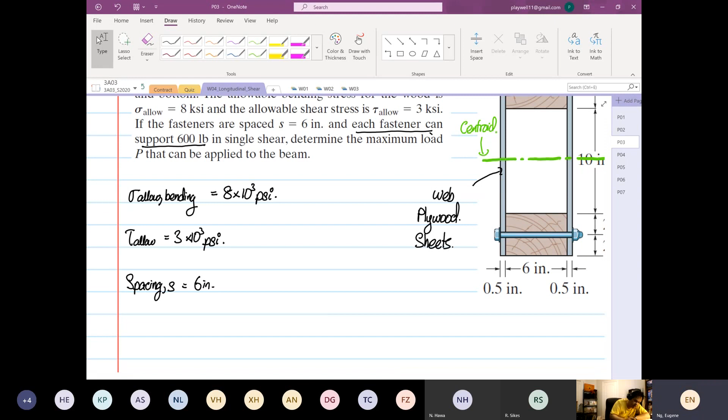Spacing S is equal to 6 inches, and each fastener can support or resist 600 pounds in single shear configuration. So each fastener can withstand 600 pounds. The force it can withstand is equal to 600 pounds of force. The fastener can resist under single shear.

Can you all remember what is the difference between single shear and double shear? Anyone please, can you remember? What do we mean by single shear and what do we mean by double shear? When you have double, you technically have two sectional areas, so you have to multiply. I don't remember, multiply or divide by 2. So the force it can withstand is twice. Okay, that's double shear.

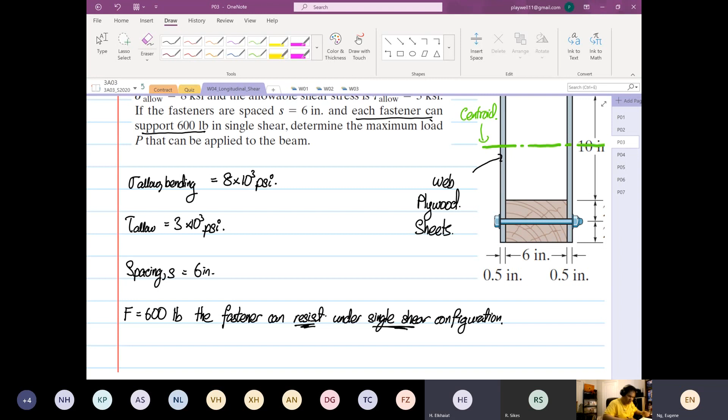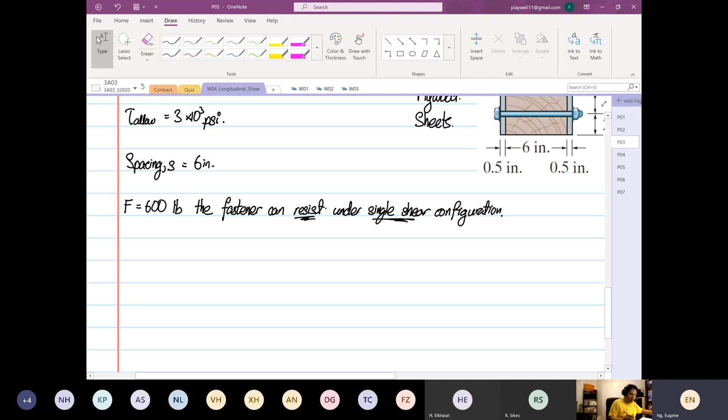So I'll draw for you single shear. Let me recap, I think you guys should have done this in 2P04, some of you have done it a long time ago. So single shear configuration goes like this. So this is single shear.

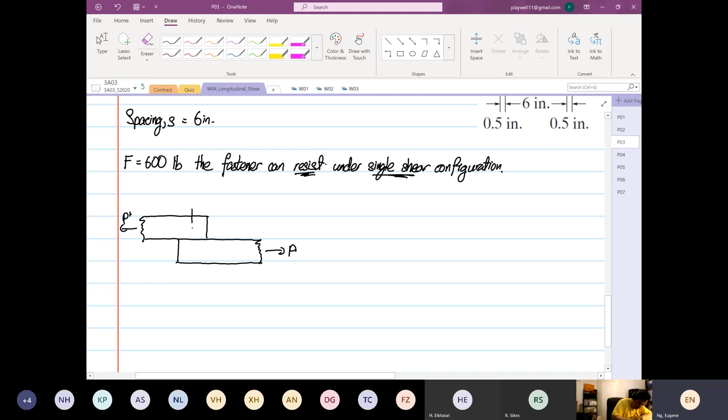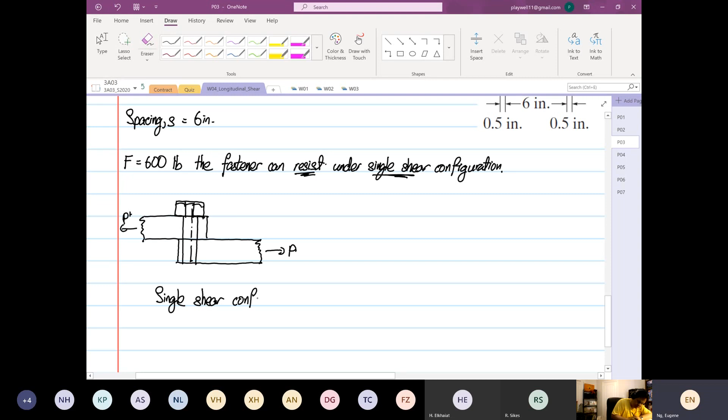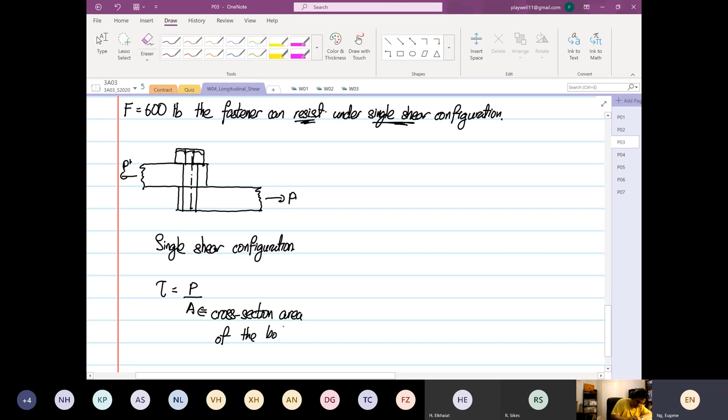So if this is your bolt, right? So this is your bolt. So this is what we call a single shear configuration, where shear stress is equal to force divided by what? By area. So the area over here is the cross-sectional area of the bolt.

So this is single shear configuration. For double shear configuration, it just looks like this. So now this is a double shear. Slightly different. So you have your bolt now looks like this. You have a bolt going in.

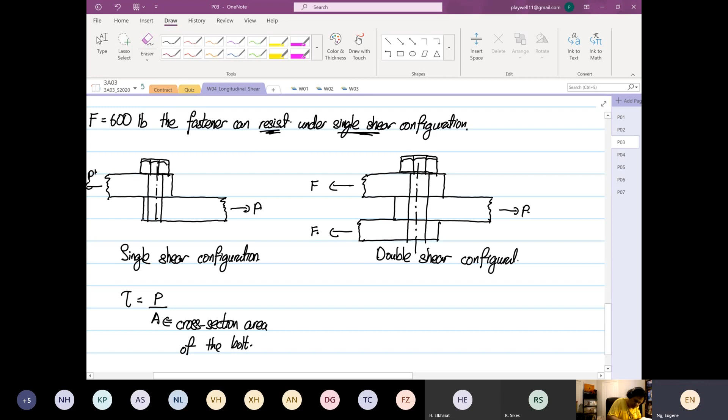So now over here you have P, and over here you have F and F. So this is what we call a double shear configuration. So the shear stress is equal to P divided by what? Twice the area, and area is the cross-sectional area of the bolt.

Right, so why twice? Anyone can tell me why 2? Anyone? So there are two areas, yeah, well done, applied in that bolt. Right, so one area is over here - too thick, I should change that marker - so one area is over here. Eugene, wake up. One area is over here, the other area is over here. So these are the areas. Whereas in a single shear configuration, over here is only one area, that's the only area, right?

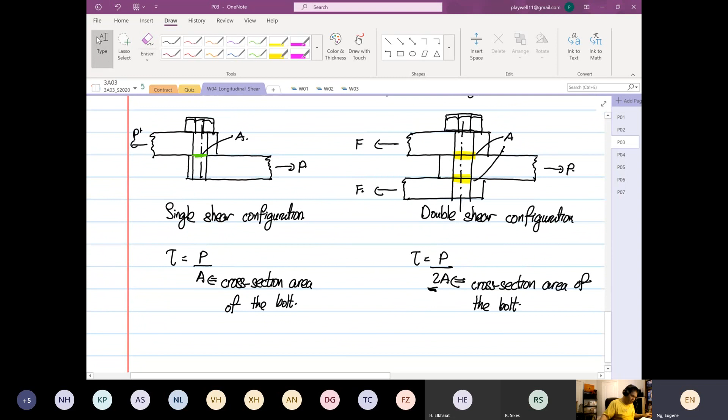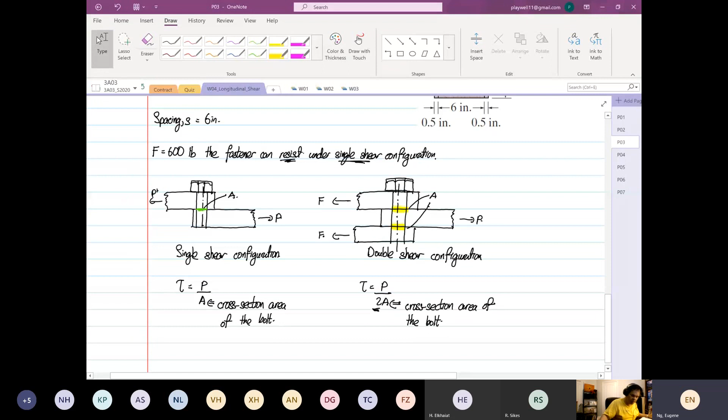Right, so now that's a very quick recap about single shear and double shear. Okay, so I'm going to copy. Any questions so far? Are you okay? So I believe you guys probably know this through 2P04, but as I said, some of you might have taken 2P04 a long time ago.

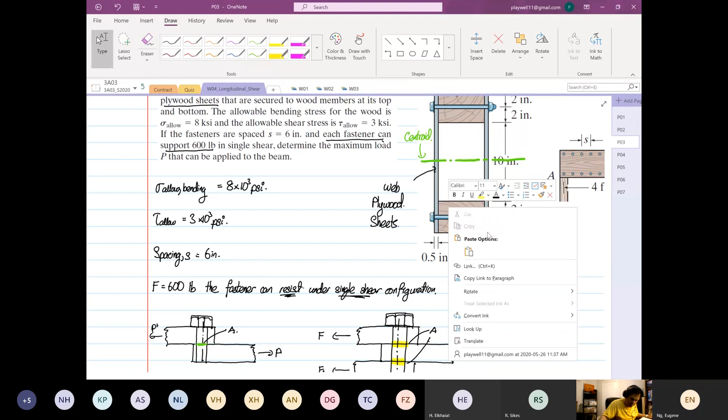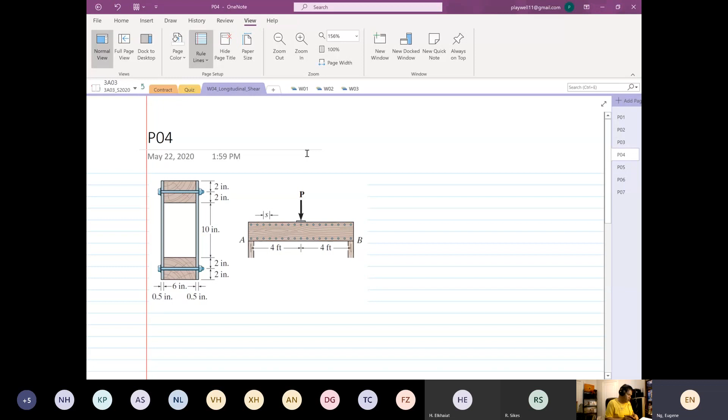Right, so I'm going to copy the diagram if I could. Sorry. So copy the diagram, bring it over here. Right, okay, so there are three possible failure modes over here. Okay, so if you look at the structure over here,

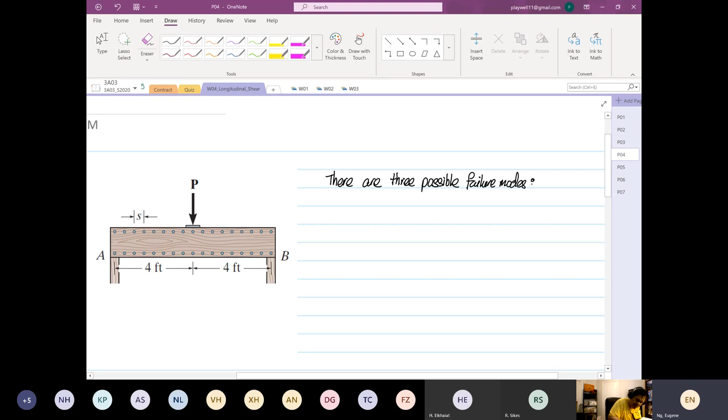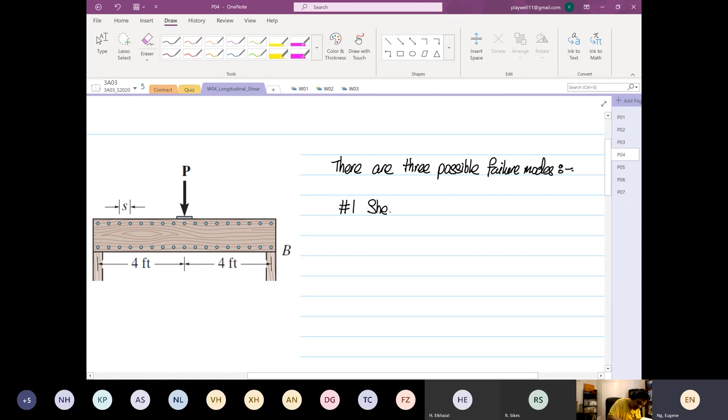there are three possible failure modes. Okay, we have three possible failure modes. Anyone? What's the first failure mode? Anyone, please. Number one, the screws or nails break in shear. Well done. So shear failure of the fastener.

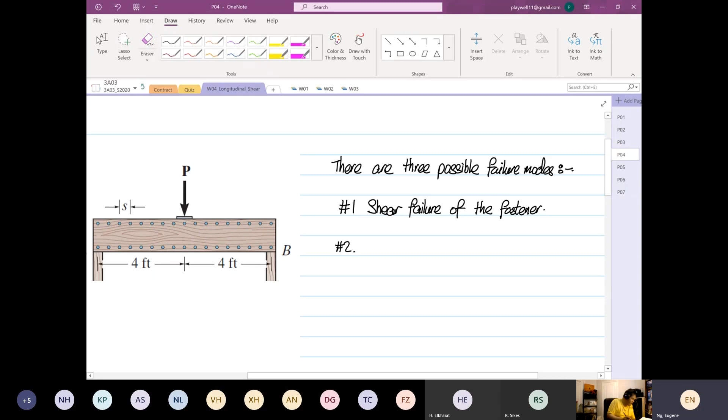And mode two, what's the other mode of failure? Anyone? Now, but before that, the shear failure of the fastener is based on what? Okay, based on the single shear force of the fastener, or single shear force per fastener, which is equal to 600 pounds. And that's not all, there's also the spacing.

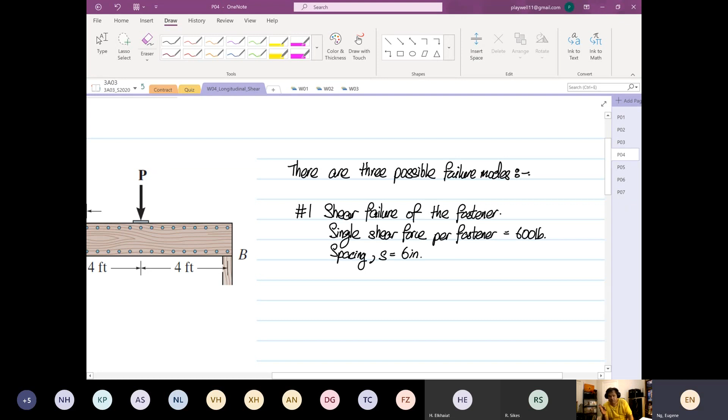Right, the spacing S is equal to what? 6 inches. That's why this spacing is critical. If you're going to load something, or you're going to put a grand piano on your deck, this spacing is going to be critical. Okay, you get it wrong, your wood will work, but your fastener will what? Will fail. Okay, I'm not asking you to put your piano on the deck, but this is what the design is meant for.

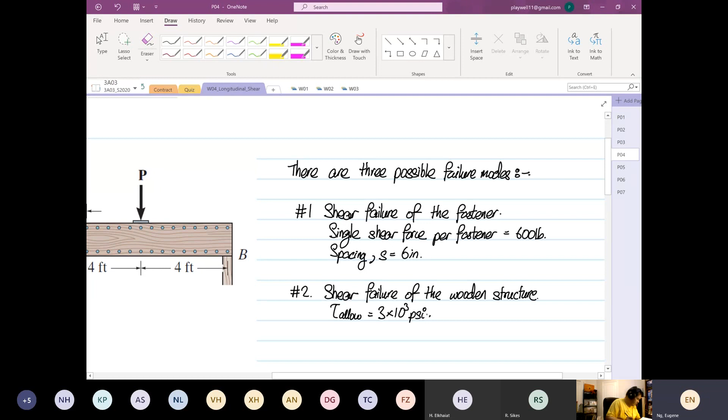And then finally, the third failure mode is normal stress failure of the wood structure due to bending moment.

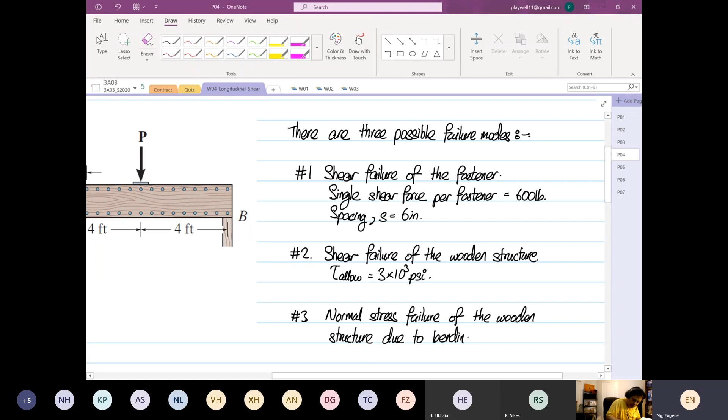Okay, so we know for this case, the normal stress allowable is equal to 8 times 10 to the power 3 psi.

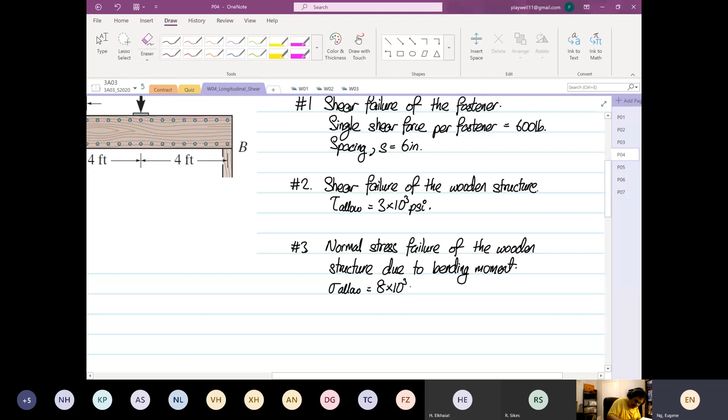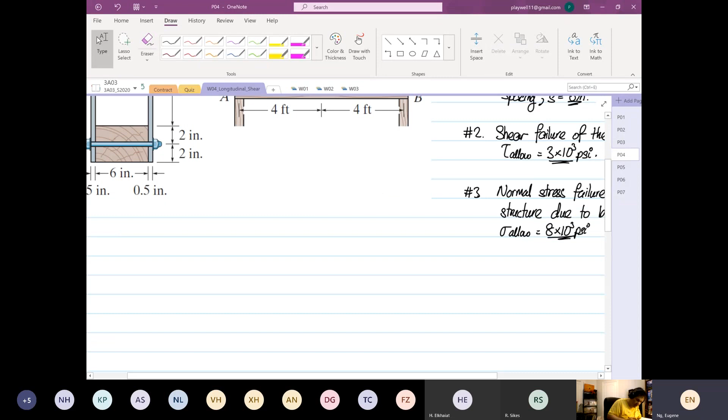Okay, so we are tasked to determine. We know there are 3 failure modes. We are tasked to determine the maximum value of P.

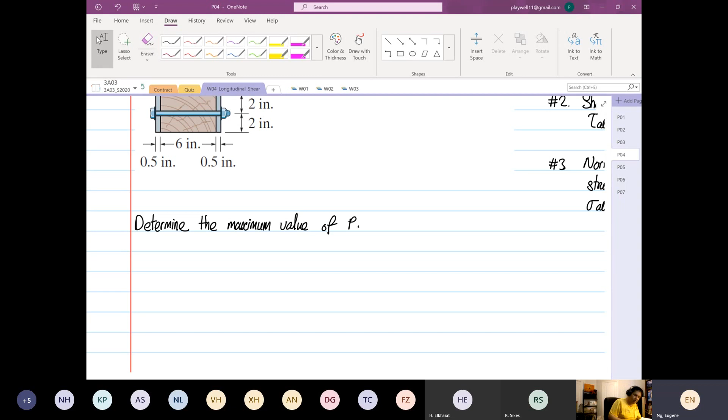And given, I don't want to do this in the question, you have to find the second moment of area of this structure. I'm going to give that value. By now, all of you should be able to find the second moment of the structure.

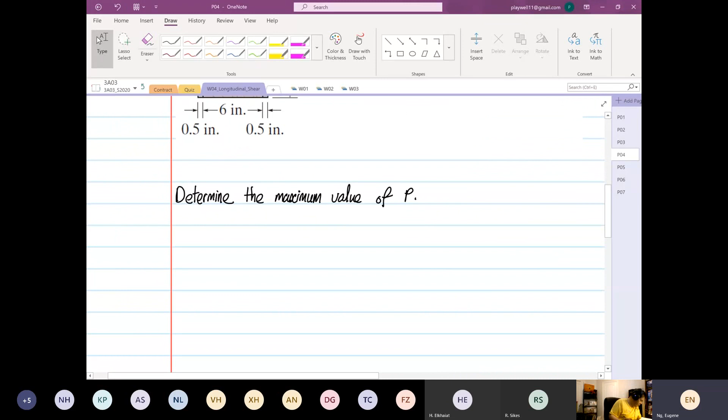So if we were to have this structure or this diagram, the view over here. This is my X, this is my Y, rotation about Z. All these are 4 feet, we have to multiply by 12, so these are all 48 inches.

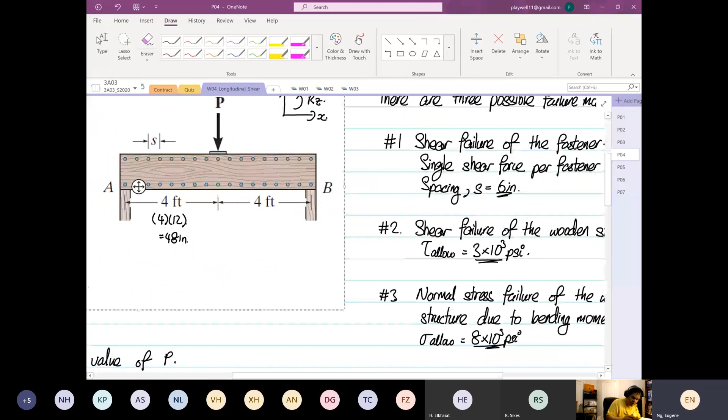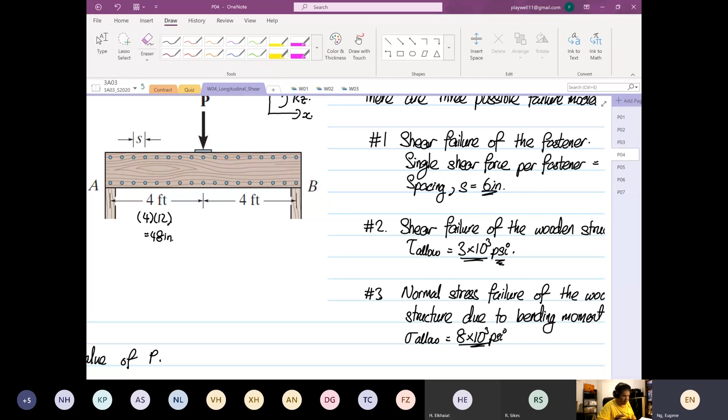Why we have to deal with inches is because our stresses are in pounds per square inch. We cannot deal in feet. If your stresses are in pound per square feet, then you can leave in feet. So you have to likewise multiply by 4, multiply by 12, 48 inches. The rest are all inches.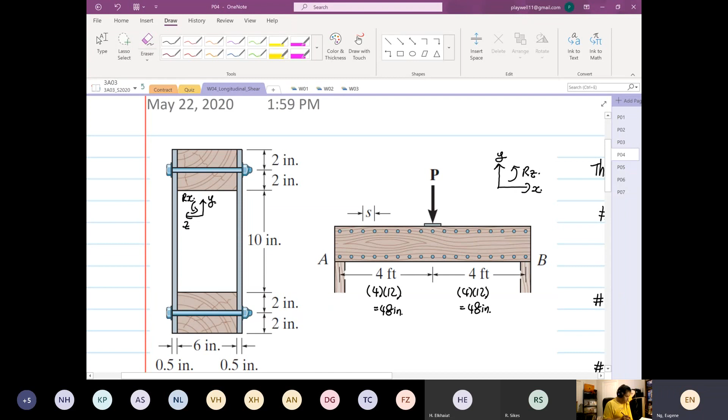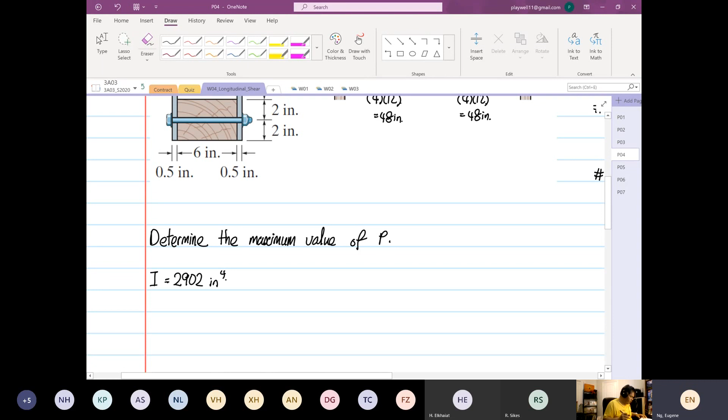Okay, so we're going to do mode 1 failure. Given that I is equal to 2902 inch to the power of 4.

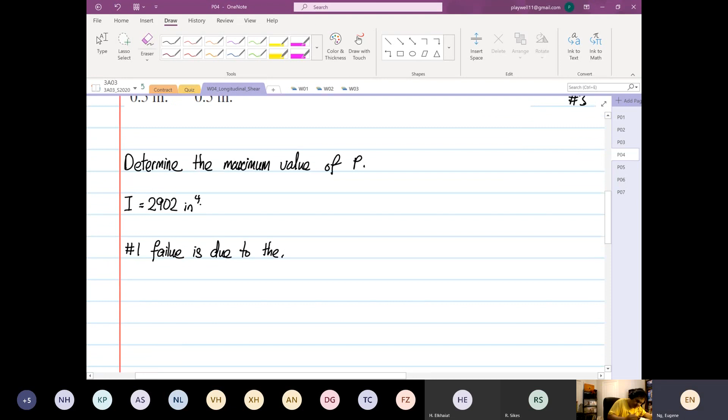So we are going to look into failure mode number 1. The failure is due to the fastener.

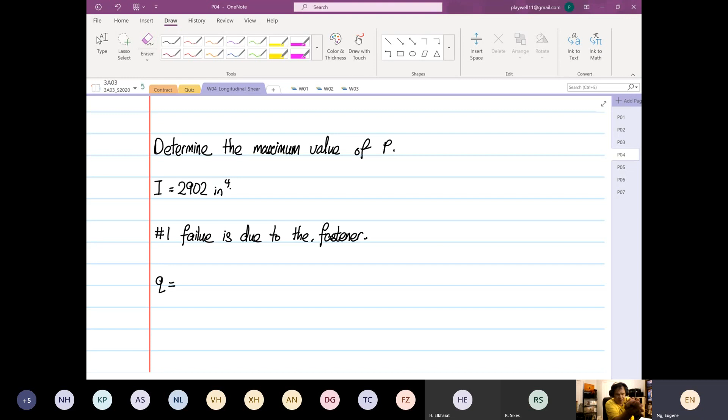So we know that Q, we're going to calculate Q first. So how are we going to relate the force to the load that the fastener can withstand? We know that Q, remember we had this formula before, Q is equal to what? So we're going to use this formula.

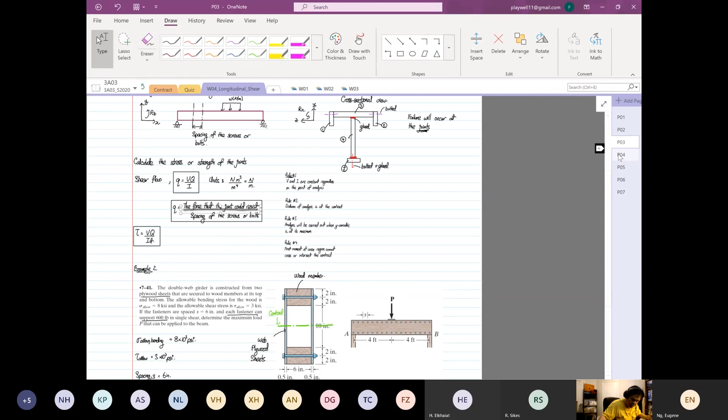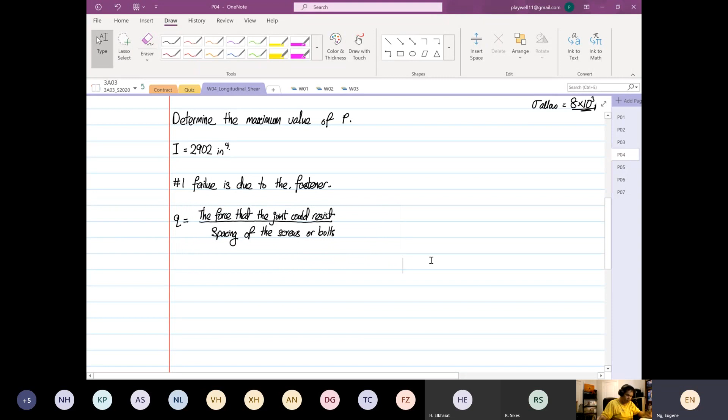We're going to use that formula over there. Q is equal to the force that the joint could withstand divided by the spacing of the screws or bolt. And if you look at the units for this expression, it's also in Newton per meter. So with this, you can relate the shear flow is also equal to Vy over Izz, Qz.

Okay, and there's no thickness, you don't need to consider thickness. So these units over here is also equal to Newton per meter. Okay, are we clear?

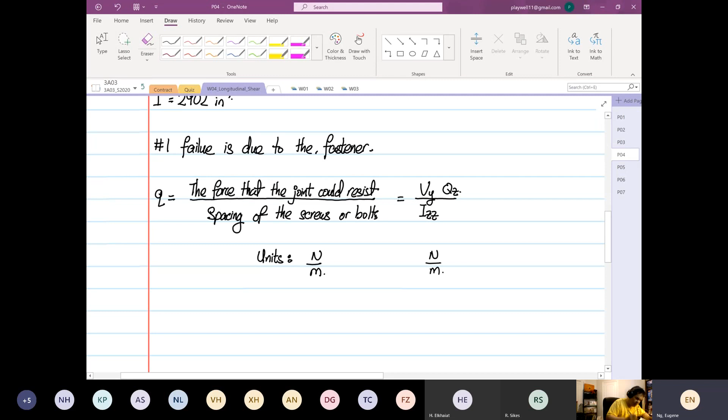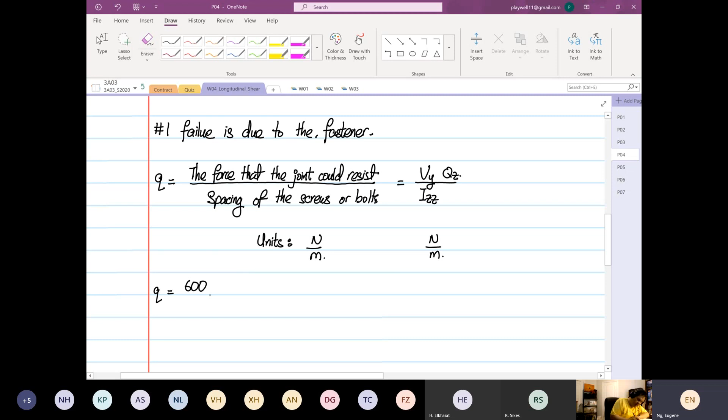So now we know that Q, we're going to calculate our Q first. Q is equal to the force that the joint could take in a single shear, 600 divide by 6 inch, the spacing.

And if you look at this structure over here, question for you guys: if I have a shear force acting down here, that is my V in my Y direction, is this under single shear or double shear configuration? Anyone, please?